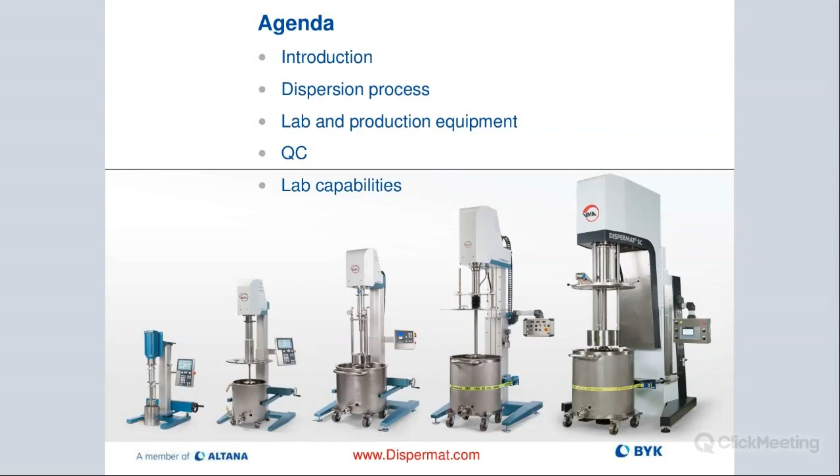So we're going to have a quick introduction about VMA, then we dive right into the actual dispersion process. We're going to talk a little bit about the different lab and production equipment solutions that we offer, and then a little bit about the QC process, and then some of the lab capabilities that we offer here in the US in Wallingford or in Germany at VMA headquarters. We have an outstanding applications lab where we can do a lot of trials and also upscale trials for production equipment.

VMA Getzmann is a German company, founded in 1972 by Hermann and Elke Getzmann, that couple on the top right. BYK-Gardner has had the exclusive distribution rights for the product line in North America since 1988. BYK actually used that equipment for quite a bit longer throughout the laboratory space in Europe and the US. What happened was some customers came in and saw the equipment run at the BYK USA facility, and they wanted to know if they could purchase that equipment. That was the starting point back then when, I think it was Dr. Peter, he decided that we would include that in the product line of our BYK instruments group, and that's how that whole thing got started.

So the company is still family owned. They have over 100 employees worldwide. They're known to make really high quality dissolvers, bead mills, basket mills for lab and manufacturing environments. They also have the Dispermat trademark that you probably have heard before, so they own that name as well.

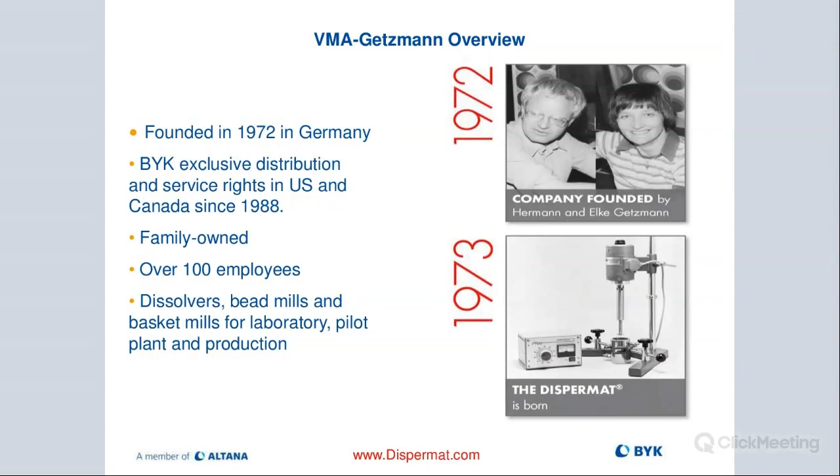And then they have a really nice lab, I mentioned that earlier, in Germany at their headquarters. The company is about 30 miles east of Cologne. So if you're ever over there and you want to visit the facility, let us know and we can set that up. And the lab in the US is at our sister company's facility at BYK USA, up in Wallingford, Connecticut.

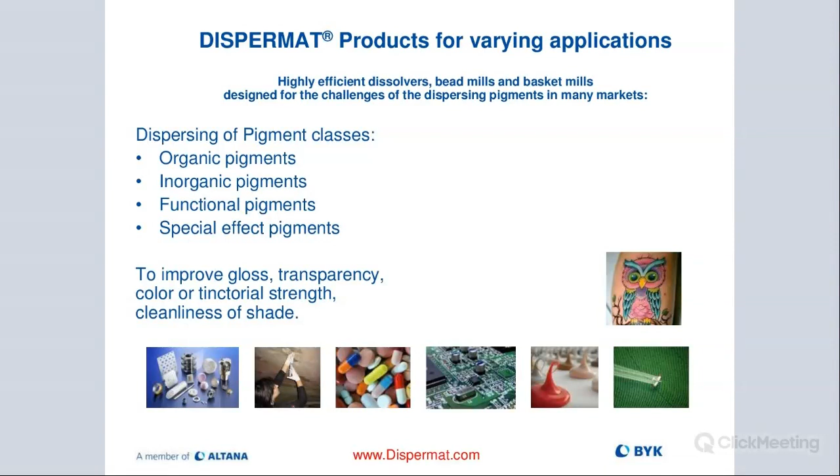So we have these organic pigments, we have inorganic pigments, we also have functional pigments and the special effect pigments. Some of you know those well - these are the silver flake effect colors, which have to be dispersed with a little bit more care because you don't want to destroy those special effect pigments, which would ruin the effect. So that's done a little bit differently. And the whole purpose of the dispersion process is to really improve the overall appearance. We want to have better gloss, transparency, color strength, and some of these major attributes that we are actually impacting by having a proper dispersion.

So this is a great slide, it really outlines it well. We are looking for improvement in our wetting process.

These van der Waals forces, some of you with a physics background may have heard about that. These are invisible electromagnetic binding forces that hold these pigment particles together. We want to reduce those clusters down to the primary particle size.

That will give us better color, better gloss, and improved overall appearance. We get better pigment efficiency that will help reduce raw material costs. We have more product consistency, and formulation improvement is another result of really good dispersion, along with a more consistent particle size distribution.

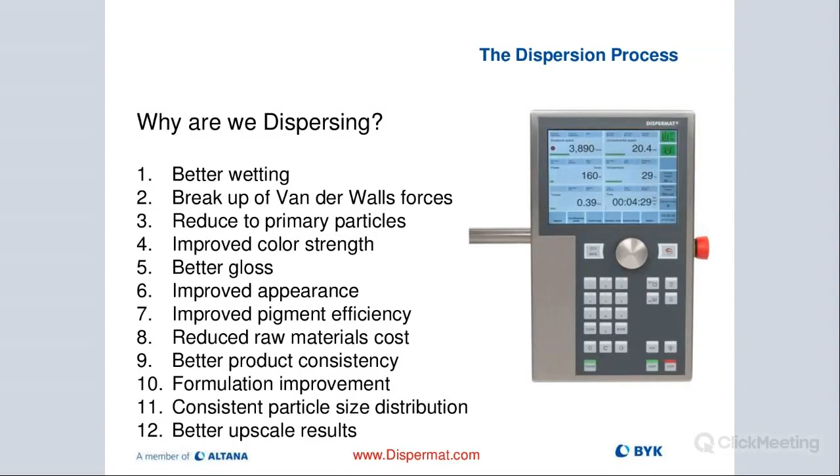Finally, we'll also get better upscale results, which is really important if I want to go into manufacturing and use the data from my laboratory or pilot scale process and then go into production. So that's why we're doing it and why that process is really important.

If we don't follow a proper pre-dispersion or dispersion process, it leads to poor quality of our product. We have issues with color, there might be a bigger delta between different lots, poor stability of our product, and also flocculation of pigments.

BYK USA is really good at helping select the right type of additives that go into the formulation to help avoid those kinds of issues, especially with flocculation, sagging, leveling, settling, and some other issues that occur. Gloss is also reduced.

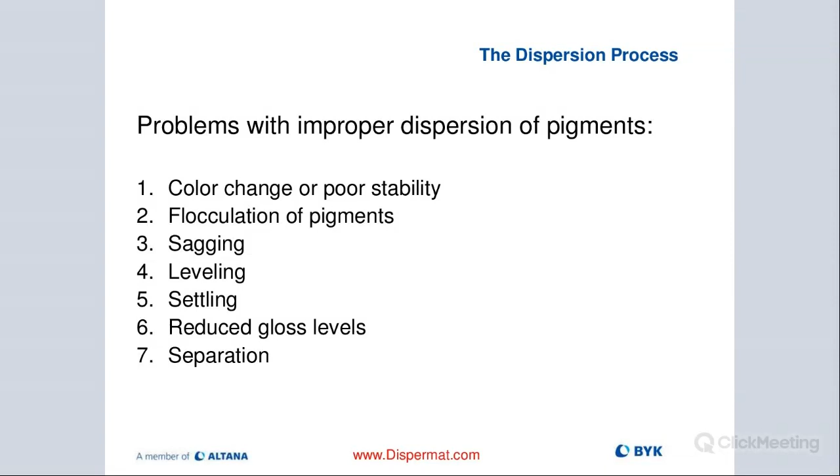Increase in haze is another issue that's coming up, and obviously separation is also another problem that happens if we improperly disperse.

It's really important to remember that we need good stability to have better color fastness, and that helps us with fading over time. Also, our brightness will be improved, which gives us the best color.

The rule of thumb in terms of pigment size is that the smaller our pigment particles, the better our overall appearance. That will also allow us to use less pigment and cut down on volume, which should help us reduce cost and save money if we properly disperse our pigment, because we don't have to use as much.

Usually, the higher the viscosity, the better the particle size distribution, and it also helps with processing the material. Obviously, there is a threshold—ideally we are looking between 3,000 to 10,000 centipoise. That's a really good range where we're able to process the materials really well.

If we are lowering viscosity, it's not an issue, but what that usually means is we have to put in more energy because the material is so low in viscosity that it's more difficult for energy to get introduced into the mill base. So we have to either drive with more watts, or run a different tip speed. There are some options to compensate for that.

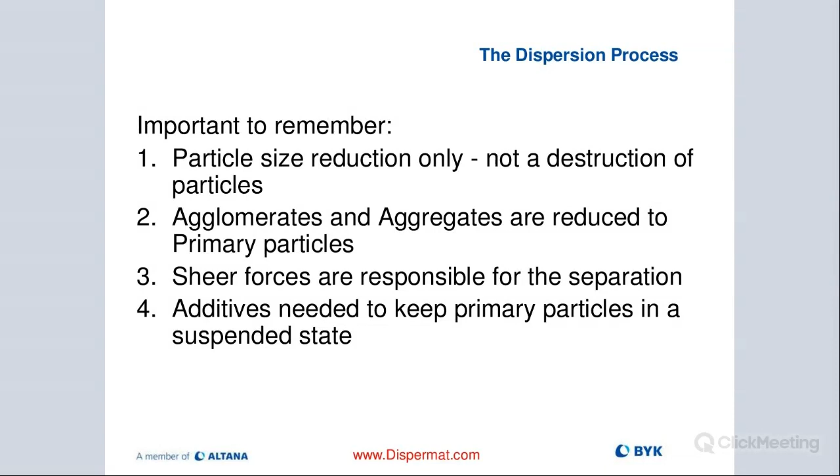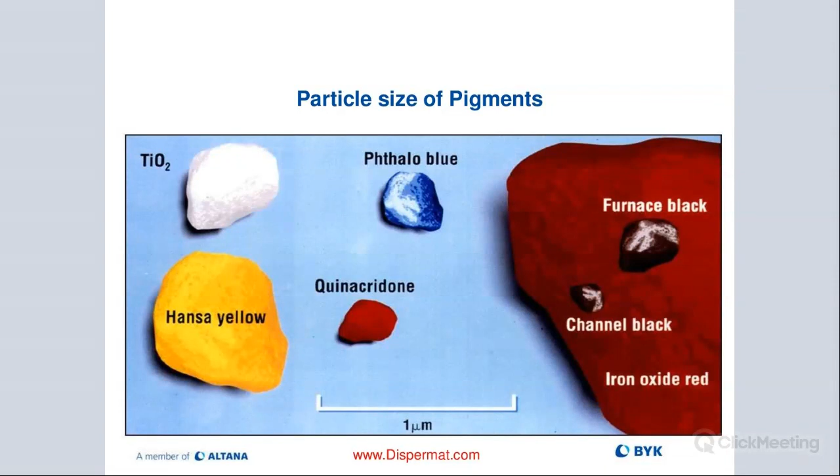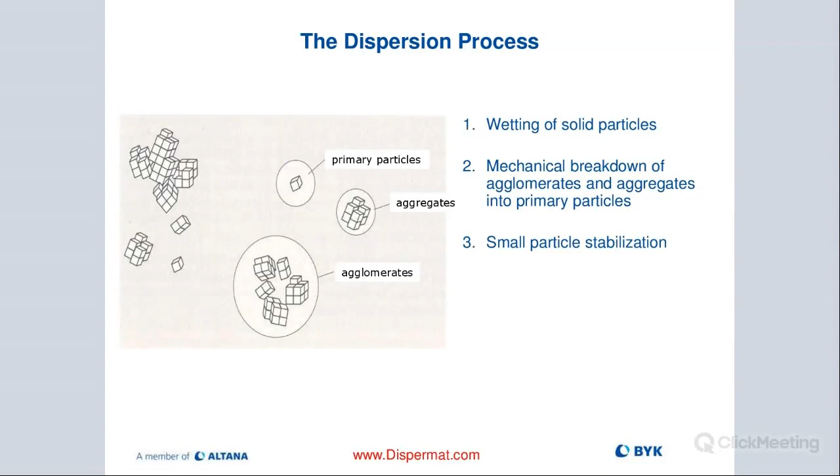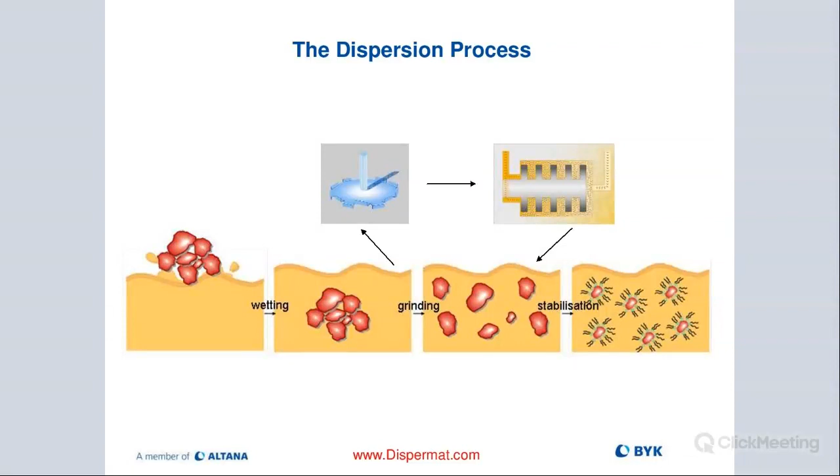Here's a great slide showing that in the beginning, with the Cowles blade, we're wetting our pigments or particles, and then breaking up these binding forces, the Van der Waals forces—usually not the case with every pigment, there are many different pigment types and families. What you're really looking for is about 10 to 20 microns of particle size, and at that point it's better to start milling. We can introduce more energy, more efficiency. So in order to reduce particles below 10 microns, usually we need to do some sort of media milling.

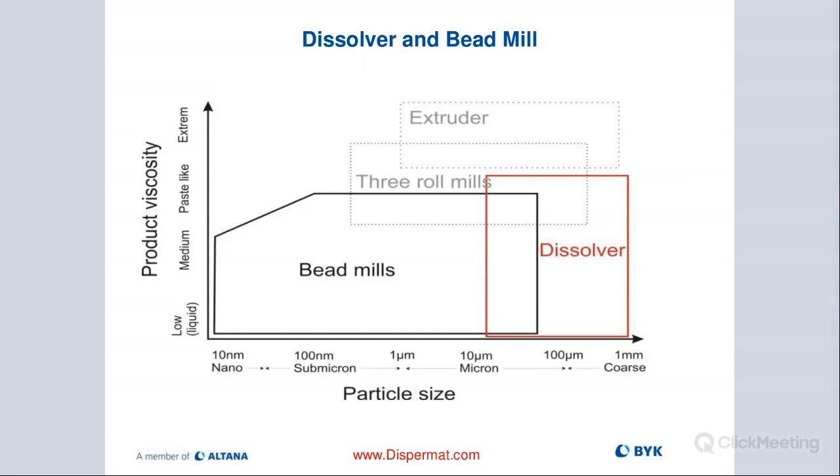Here you can see the breakout. We use a dissolver, as shown on the slide, down to about 10 microns, so very efficient. Then we need to do the milling if we want to go smaller. With the right milling setup, we're able to go way down, sub-100, sub-50 nanometers—not unusual with the right attachments. We have nano kits and dedicated nano milling systems that can be utilized to really get down into that particle size range. We also have some of that capability up in Wallingford at our applications lab at BYK USA headquarters. So if you have any products you want to test or come take a look, we'll be more than glad to discuss that with you and have you up there.

So we offer a variety of different technologies in this dispersion process, but in the pre-dispersion process, what you really want to look at—and this is the same for all the different types of equipment—is the tip speed should be between 18 to 25 meters per second. That's the sweet spot, that's where you want to be. Basically, that's where you really start breaking up these binding forces.

Anything less than that may give you the same results, but it will take much longer. Or in some instances, you may never get there and get the results you're looking for. And we would use dissolvers for that with those blades.

We have different types of systems: the SC for production, and a budgetary model, the LC. We have a really nice small unit for the lab space called the CV with different safety functions, which we'll go through. The CN and AE are our higher end models with different upscaling capabilities and also data storage capabilities.

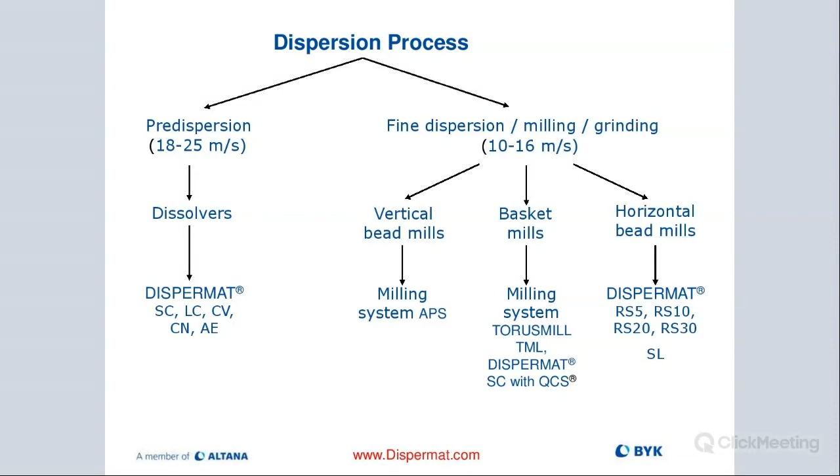And when we talk about milling, the fine dispersing, we obviously have different types of vertical bead mills, basket mills, and horizontal bead mills also available for lab as well as pilot and production.

So here's a very important slide that always comes up: the diameter of the blade in proportion to my container diameter. You're looking at about 1/3 to, in some cases, 2/3. On the right side there's a nice table, and you can see there isn't just one blade that fits every container, or one container, one blade per container.

It's really a range, and depending on the viscosity and flow pattern, you can really see - for example, if I have a 1 liter, about a quart, I can go all the way from a 30 up to a 70. That's quite a bit of range, but the sweet spot, probably what we do in the lab, is use a 50 to 60 millimeter blade depending on viscosity to achieve really good results. We've seen in some instances, if the viscosity is very high, we have to go with a little bit larger blade to move the product.

And in some cases, for certain formulations, they require a smaller blade. But there is a really nice wide range of different blades, and many different blade types, so we have a good variety. I know some of the other companies out there offer some very unique blade solutions, so go check that out online.

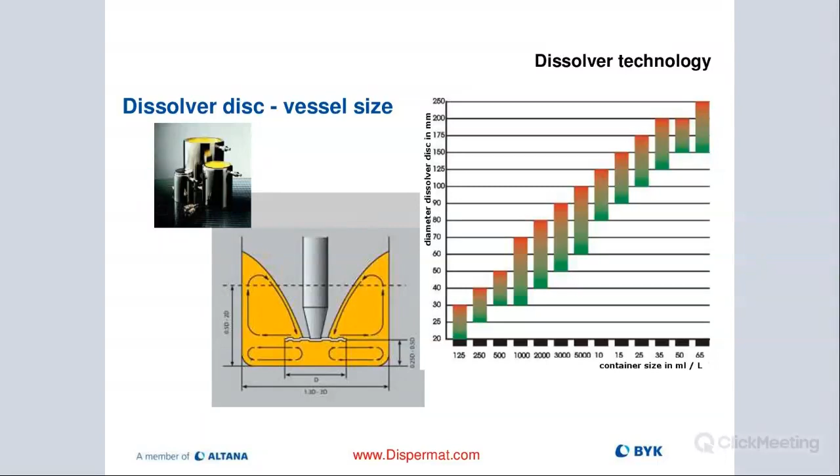Then here's a very important calculation: how do you figure out the tip speed? The tip speed is actually the RPMs multiplied by pi times the diameter of your milling disc. In this case we figure out meters per second. So let's say you have a 50 millimeter blade, you multiply it by 0.05, and then divide everything by 60, and that would give you meters per second if you want to calculate that.

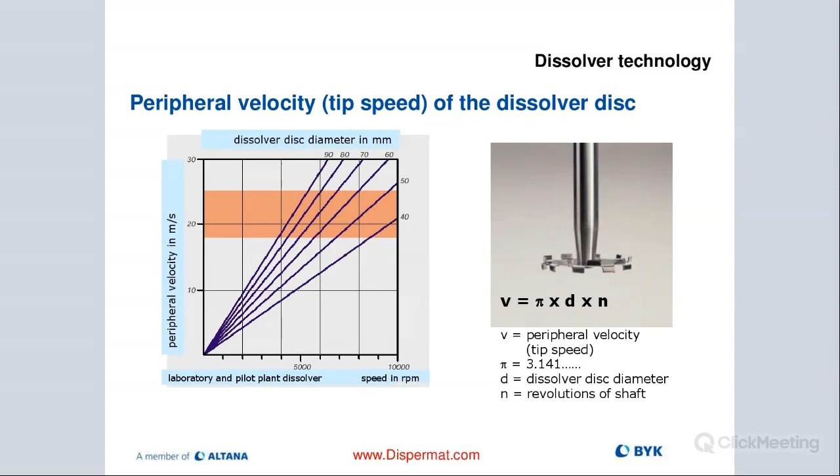On our higher end DISPERMATs, that's actually displayed on the control panel, you can see it. On the lower end models or intro models, you have to calculate it. And that's why that formula could be helpful.

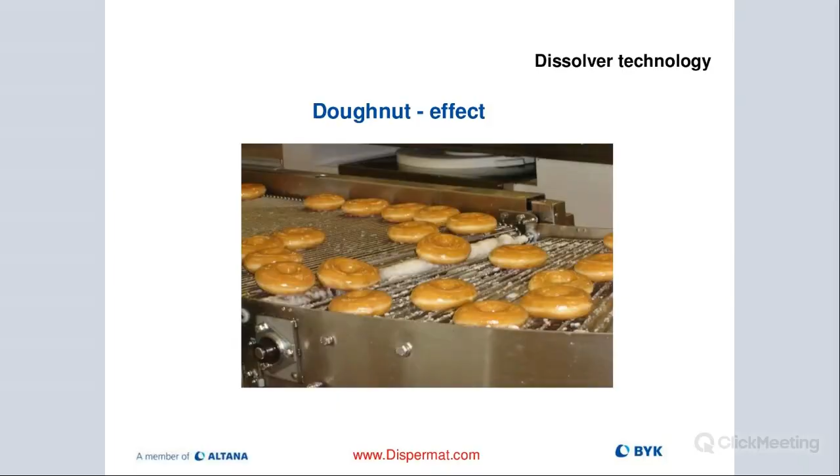So we have something called the donut effect, and it's really called that. The reason is, when you look inside the container and optimize the dispersion process, at 18 to 25 meters per second with a really good viscosity range, you should see something like that. And then you already know it's very likely that you're optimizing the process and things are getting properly dispersed. That's called the donut effect, and it's really desirable in the pre-dispersion process.

When you're milling, you don't really have a donut - this is really something that only happens in the pre-dispersion process. So blade diameter, the geometry of my blade in relation to my container size, obviously plays a big role as well. If my blade diameter is too small, I may not be able to get a donut, and if it's too large, maybe I won't have a donut either. So this is really about optimizing all the different variables, and then you should have a donut.

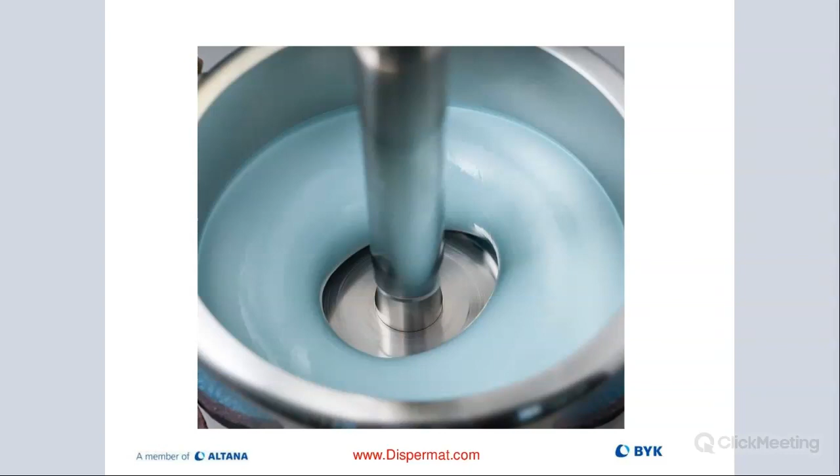Also, if the viscosity is really low, it's difficult for a donut to form because it would automatically collapse as soon as it has a chance to form. And when the viscosity is too high, let's say material is like peanut butter, you will not have a donut because the product just wouldn't move for a donut to actually appear. So this is something you'd see in the 3 to 10,000 centipoise range, when you optimize these variables we discussed, and you should really have a nice looking donut.

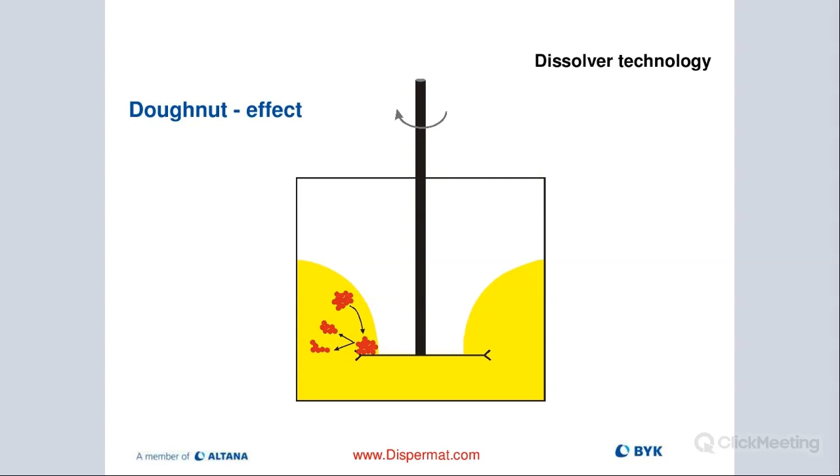This is what happens on the graph. You can see at the edges of the blade, this is actually where the separation of our particles takes place - that's where we break up these van der Waals forces. I'd say this also happens below the disc. It's not shown on this particular picture, but you'd have a similar effect below the disc, not just on top. So that's something I think is missing from that picture.

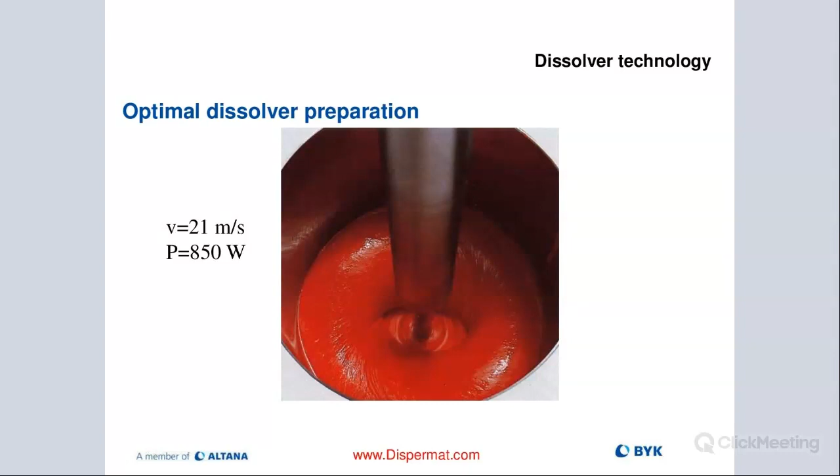Okay, here you can see definitely a good looking donut. We are running 21 meters per second, and at that viscosity range, we are able to put in 850 watts of energy to get that tip speed. So that's what you want. It looks great.

Now, in this case, we're not so lucky, and our viscosity is different. We're only putting in 320 watts of energy at the same tip speed. That means our viscosity is probably a little bit too low, and we're not able to properly disperse this material. So what could help there is changing formulation to bump up the viscosity somewhat. You could increase the tip speed, maybe for a better donut.

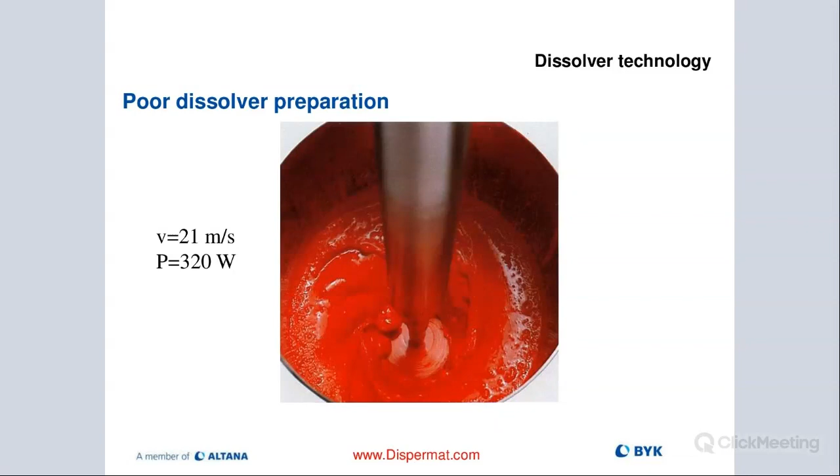Also, what could help is maybe change the blade diameter. That would also be something else that you could look at. That would probably help with putting in a little bit more energy. But that's something right here on this picture that's not desirable. We would call that a poor dissolver prep.

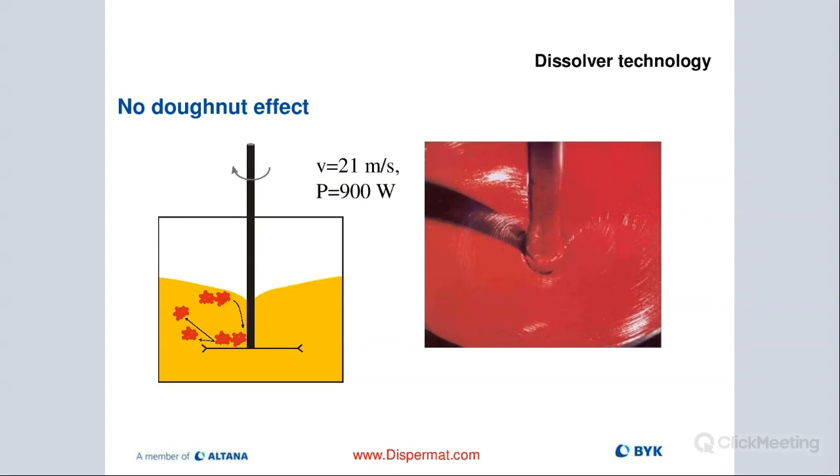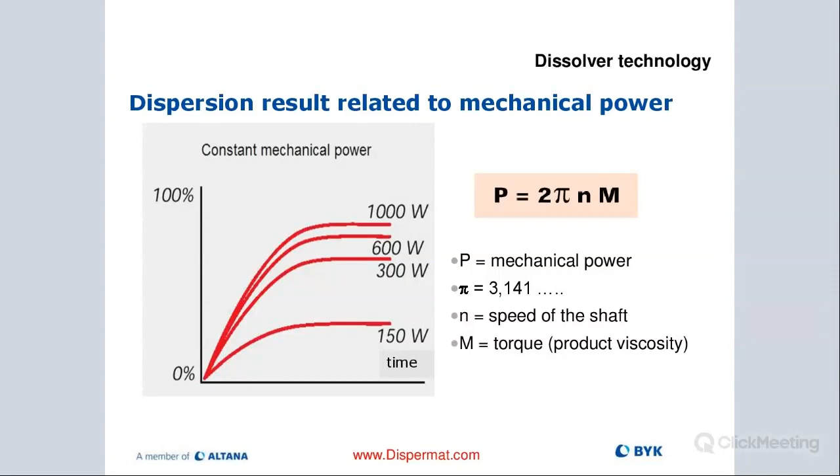This is just a slide on dispersion result related to mechanical power. So P, mechanical power, equals 2 times pi times the RPMs times torque. That will give us the amount of energy that we're actually putting into our mill base. And on the higher end models, we show that we can also run our equipment with what is called constant power instead of just constant speed.

That way you select a certain amount of energy you want to put in, let's say 1000 watts. And then the machine, depending on the viscosity of your material, will automatically adjust the speed to always maintain that amount of energy. So if our viscosity is increasing, our speed will decrease because we are maintaining the 1000 watts of energy. If our viscosity decreases, then our speed would increase because we're still maintaining that 1000 watt energy input. And that is something called constant power.

And that is sometimes used also to calculate upscale costs or manufacturing costs, because it will tell us exactly how much energy we are using in a certain amount of time to manufacture or disperse X amount of product. So that can be very helpful. And that is a feature that we have on the higher end models like the AE or the CA. That option is available. We can also do what's called a net power calibration, just to mention that.

That means that we run the machine without any product for, I think, 30 seconds. And then all the values get set to zero, the energy that it's using to operate itself, because the machine obviously is using power just to run the shaft, even if there is no product. So when we do a net power calibration, we factor out that influence or that noise, and then the numbers we see on the display are only related to our product and not the machine input. And that also is available on the higher end models.

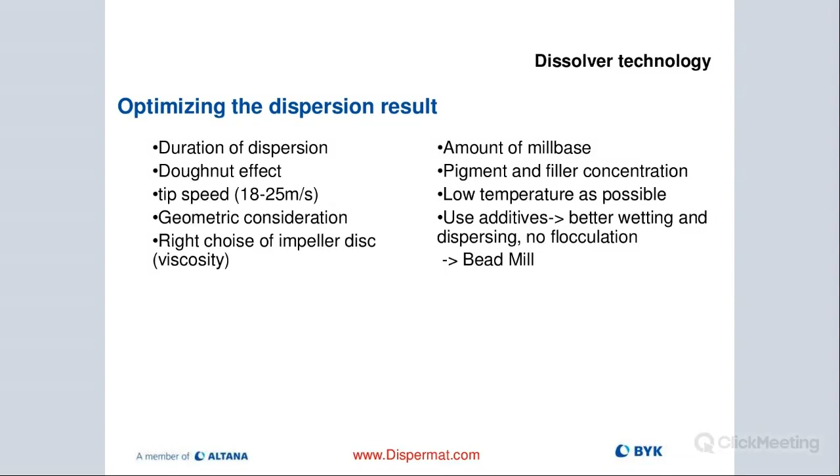So the difference here is really with the dissolver, it's a necessary step. The pre-dispersion before I'm actually going to start milling. I have a limited amount of energy input. It's just such that a blade alone without media is just a blade, and will never allow for such a high energy input as you have with a milling disc with media. So therefore our shear force is limited, and it's really only to deagglomerate.

So we are going from the larger clusters, these agglomerates, down to the aggregate level, and that's when we would use the Dispermat or dissolver. And we're not breaking down to the primary particles with just a disc. But again, it's really critical that we use that step. And if we stop at the aggregate level, then obviously we're going to have appearance issues, and our product is just not going to be as consistent and maybe as desirable for the naked eye

if we would process this then in the secondary step with the media mill, where we're able to actually add a lot more energy, and then we really break down these binding forces down to the primary particle size, and that allows us to actually go sub micron range all the way down to sub 50 nanometers. We have seen that will give us a much better looking product, better color strength, particle size distribution, transparency, haze, gloss. All these things should be affected by having a good processing step through a bead mill.

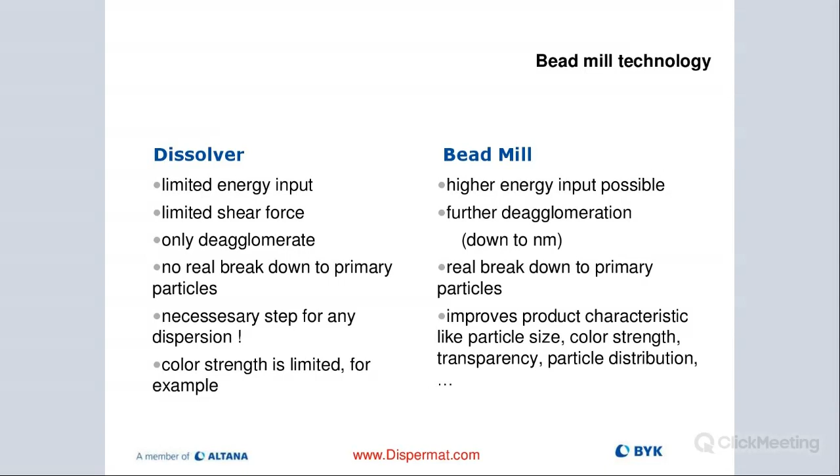But right below the motor is a flange, and that's called the quick disconnect, or the TML, a DL shaft, we call it. And it's basically a clamping ring that you can open, and you can rotate that whole assembly 180 degrees, and then you can replace the dissolver shaft, for example, with the rotor stator, or you can add a basket mill or a vertical bead mill, all on the same machine. And that is something that is patented with VMA to be so versatile with the quick change system. And it basically allows you to purchase one machine for many different types of applications.

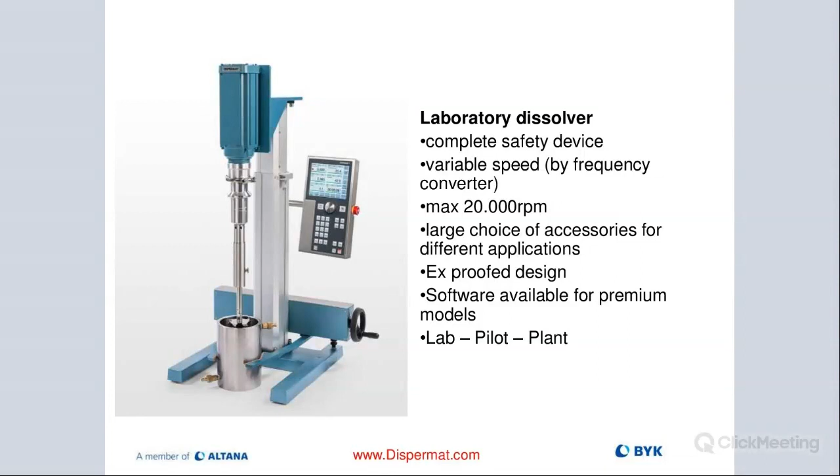And then you can see on the Dispermats, it's also very important to our processing, that we have a shaft guard that allows us to actually run the disperser without having any rotating or moving parts outside of the container. So that shaft guard, there's a little thumb screw right there that you can loosen and tighten to move that shaft guard up and down along the shaft to ensure that the shaft is properly covered when you are dispersing your material.

Okay, then with these different types of tools, we have them as a homogenizer. There's just a butterfly attachment or a propeller blade that allows you to turn that whole thing into a mixer or a homogenizer. You can also add a rotor stator, as I mentioned. That's an attachment that allows you to emulsify different products at a very high shear rate, and then you would basically mix them or emulsify these products.

That usually is a good idea if the viscosity is very low, then that's a good tool to have. If the viscosity is very high, nothing would happen. The rotor stator would just basically stick in your mill base like a consistency of peanut butter, and there is no way that product would actually get pushed through these little gaps of the rotor and stator, so it wouldn't actually accomplish anything. So the viscosity needs to be really low for that to be effective.

And then, of course, these are all out-of-the-box dispersers that have the capability of obviously using it as the dissolver with the Cowles blade. Most of the models ship with a number of different blade diameters. Well, then you could convert them either to a basket mill by just attaching that with the quick change system, or add a milling disc and then use it as a vertical bead mill with our APS system. It's called an air pressure system. It's kind of a vertical bead mill setup. That's really nice.

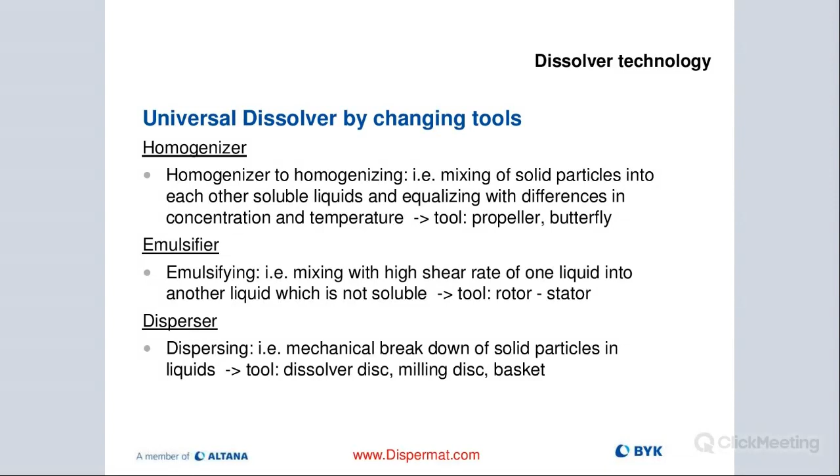It's basically a rotating platform, and the sweeper blade is actually fixed, and then your container would spin once it's on the platform. And then basically, because it's on this spinning platform and the sweeper blade is fixed, that's what would move the product off the container wall and push it into the middle of our container, where then the dispersing blade will take over and do the proper dispersing of our mill base.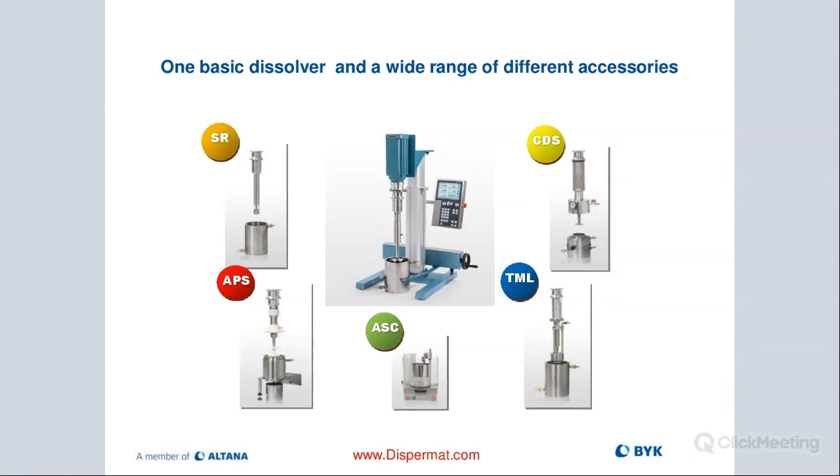So I just briefly want to go through a few models if you're interested. This is our entry-level model. It's called the LC. Just a very simple speed display. It's got a timer function, and that's it. You have to lift. I'm not a fan of it personally, because I like to have the electric lift capability that allows me to really lock in the right blade height in my container, and I don't want to do this by lifting up the motor head every time I want to change position. But that's what you have to do on the LC.

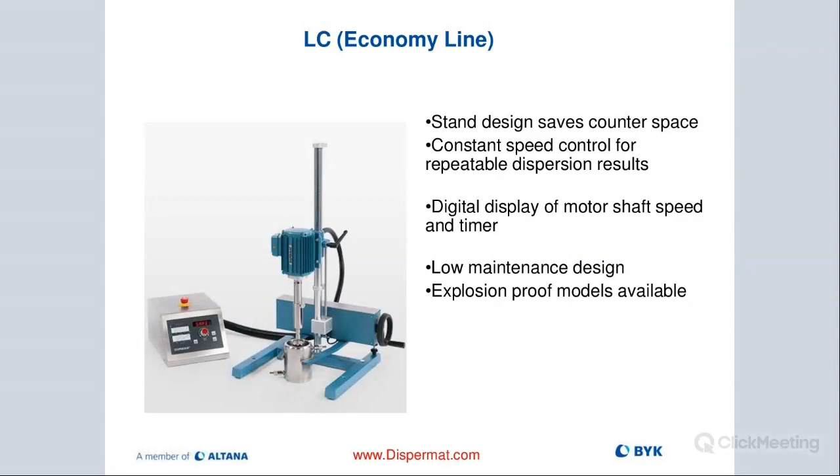You see that little lever right next to the motor on the stand, and that's what you have to open or close, and then it allows you to move the motor or the shaft up and down the column. It's okay. It's not my favorite, but it's comparatively an inexpensive lab scale solution. We also offer explosion-proof models in that design, but I want to mention they all run on 400 volt or 480 or 208, depending on the power in your building. So they're not single-phase. All the explosion-proof models are three-phase machines.

Then we have the CV line, which is actually our most popular lab scale model that has the same capabilities as the LC, except you now have the automatic motor lift up and down, so you can really precisely position the blade in the container without having to move the motor up and down by hand. It has a timer function, obviously the display of our current speed, but this one will also give you a torque reading and product temperature.

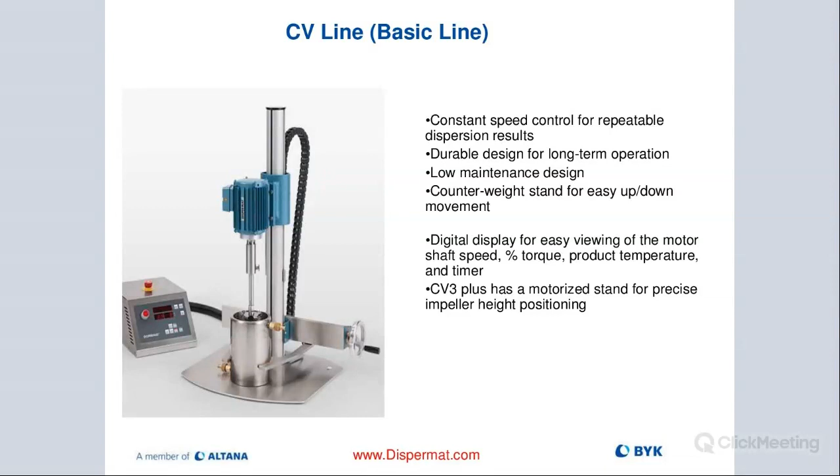Product temperature is really important if you want to convert the CV model to a basket mill, or want to attach a basket mill or an APS, a vertical bead mill. That's when you really want to know what the temperature is during the milling process. So this particular model will give you that capability.

Then we offer the CN, which is more of a higher end model than the CV. You also have all the same safety features, but you're able to really upscale with this particular model and stay within the same model family. I can go up to about 50 gallons of material if I'm getting a CN 100, for example, and that would allow you to really disperse large volumes for pilot scale, and the same machine would be available for small lab scale as well. So you would stay within the same model family if you're trying to upscale. Same control capabilities, speed, torque, temperature, and timer function. And again, it has the electric lift motor to properly position the blade in the container.

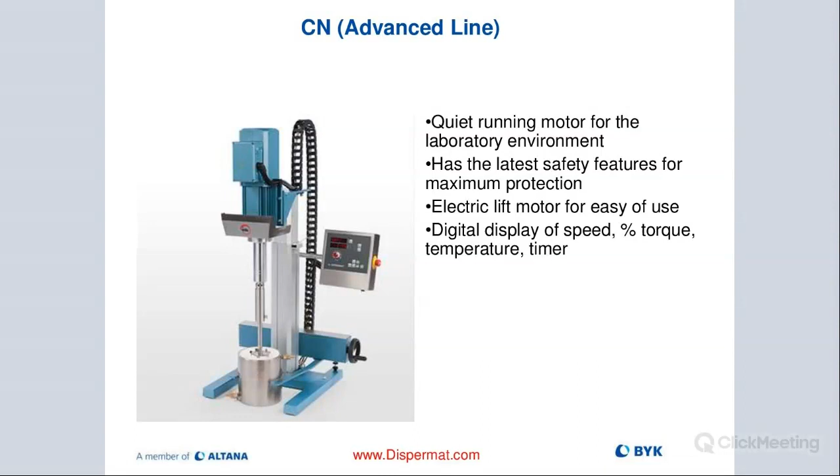And also I want to mention all of our motors are direct drive. We do not have any belts, so there's no real maintenance. They are brushless step motors. They're extremely quiet. If you have never seen one, at the next show, American or Western Coating Show, we will have a model. Come up to the booth, we'll turn it on. You'll be surprised how quiet they are. You won't even know that they're running. And also, they have very low vibration. You could put a quarter on top of the motor at high RPMs and it would not even move, because they're so quiet and so stable.

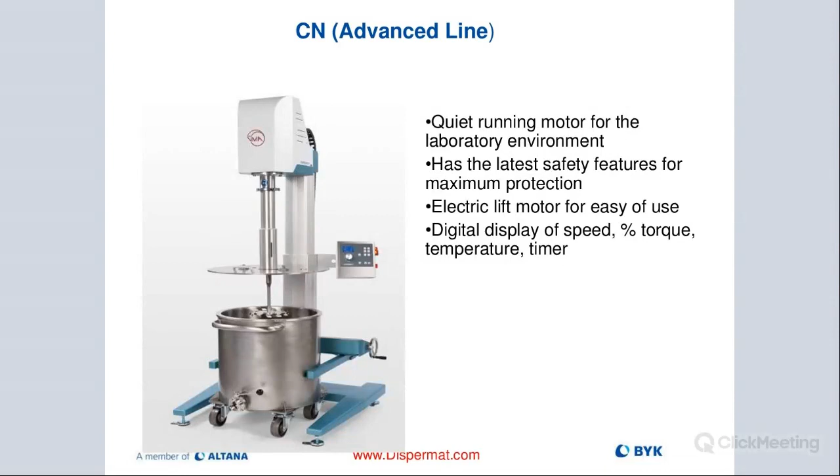And then we have the larger CN right here, same type of capability, except this one is now for small production or pilot. And then this is our premium model, which is called the Dispermat AE. That model, as I have mentioned before, comes with that C technology package. If you're looking for something where you want to program a recipe, you want to store data on a stick or on a PC for creating lab reports, if you want to watch the dispersion process in real time on a graphical interface, then you have these capabilities with that particular model. It's really good for upscale.

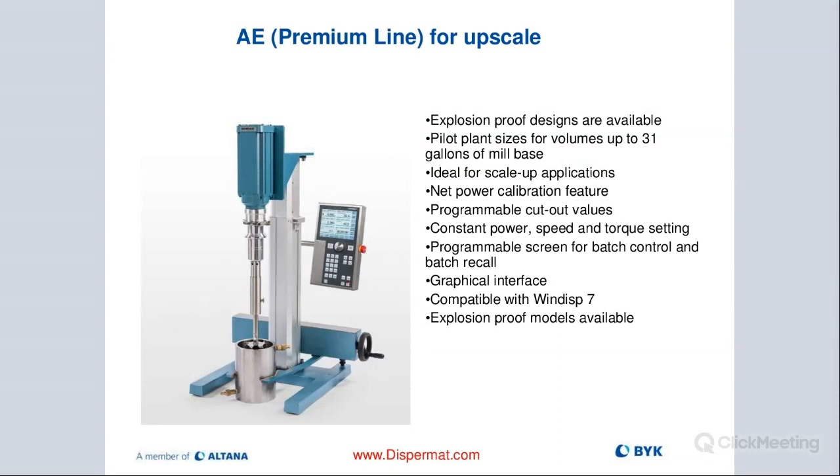And you can get larger models, again, similar to the CN, all the way up, in this case, to 31 gallons of mill base. And also explosion-proof models are available. Here, same model except larger.

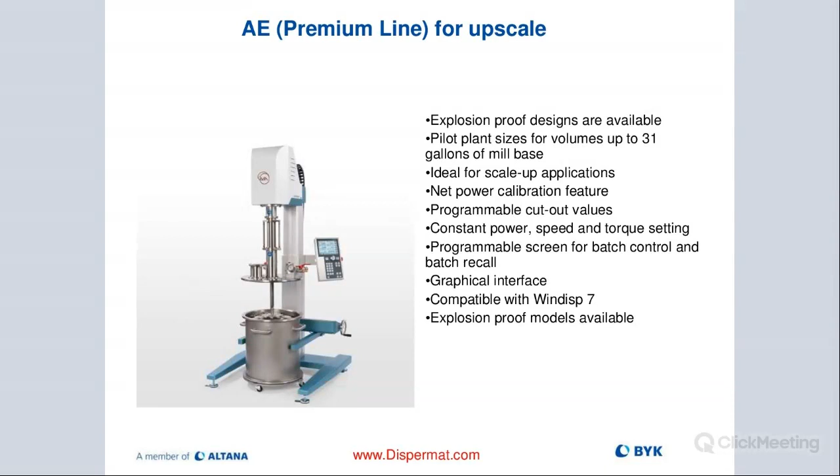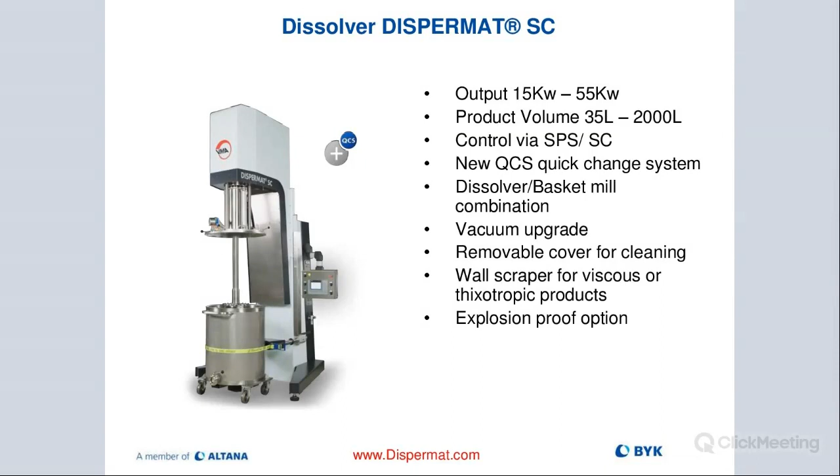And then we have the Dispermat SC for production, up to 2,000 liters of product volume. We also have the quick change system, which is really cool. For production, you have one machine that can act as a disperser, a dissolver, or a mixer, and at the same time you can convert it into a basket mill with that quick change system.

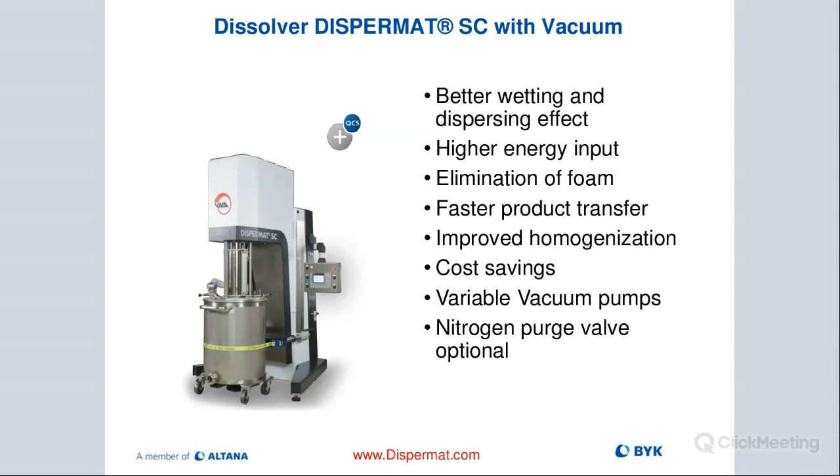We offer vacuum capability for manufacturing, and some people use it for lab scale too, but that's a manufacturing scale feature. Some people prefer to do the dispersing process under vacuum to remove all the air, and also do milling that way. If you mill under vacuum, it improves milling efficiency. Imagine air bubbles in the mill base act like tiny little air mattresses that buffer the blows of our beads during milling. So removing those air mattresses gets us better milling efficiency and a more homogeneous product.

In some cases, we have the ability to add a nitrogen purging valve. Some people like to work in a dry environment, so they want nitrogen or another inert gas, and that's also possible to add in our models.

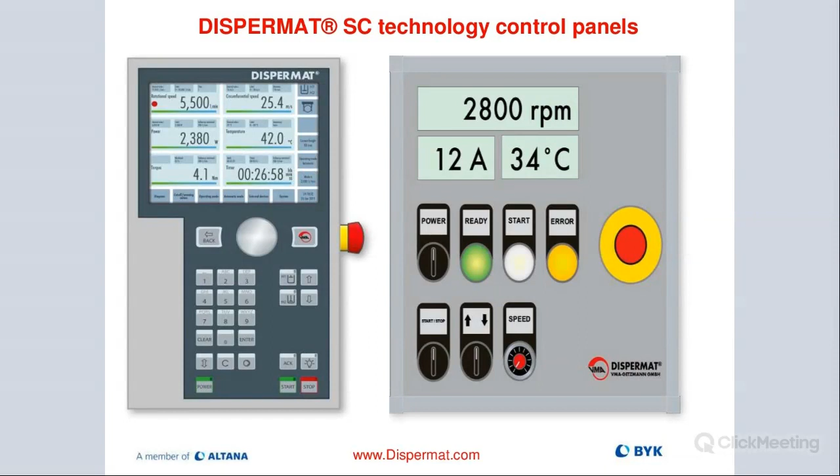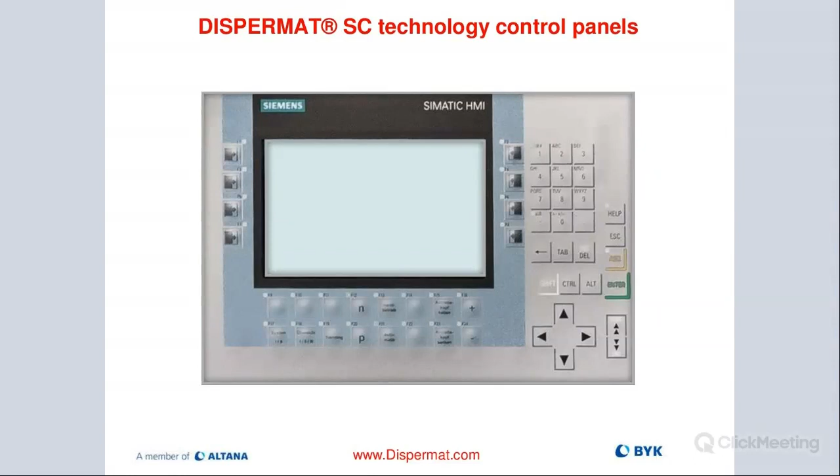We also have that technology, PLC, where you can actually create your own program or tie it into your own QC package. Some people have integrated scales. With that solution, you basically control the process the way you want to control it, but you can also add different parameters that wouldn't be available otherwise. Now, the problem with this particular solution is that it's made by Siemens, and the lead times are excruciatingly long. I think the last I heard was like 12 or 16 months lead time if somebody would want that particular control capability.

On the higher model, we have the ability to program what are called cut out values. So we can have a recipe where we put in all the parameters we want, even the height of our blade, timer, temperature, and then we have cutoff values. Let's say I have a temperature sensitive product. I can select it has two warning zones and an action zone. So let's say I have 80C as my limit. I can have a warning at 60C, a warning at 70C, and then once it reaches 80C, we can tell it to either shut the machine off or run at a different speed. So there are some ways those warning signs can be dealt with.

You can also have cutoff values for the energy input or the speed if you're running with constant power. If you're running with constant speed, you can have cutoff values for your power input. So there's a number of ways you can modify your process. You can also see the entire dispersion process in real time with trend lines for each of these variables, which allows you to monitor the entire dispersion process in real time.

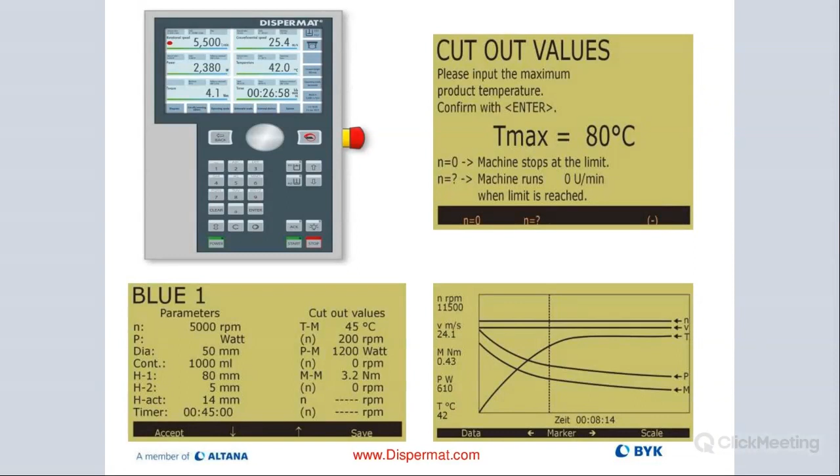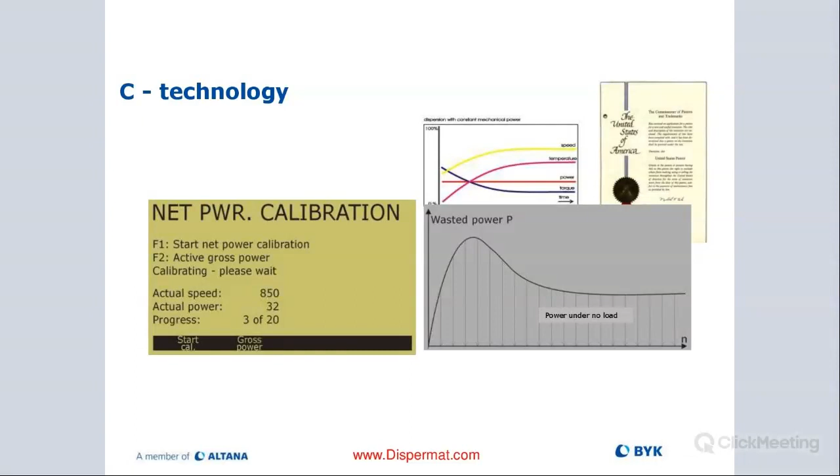The net power calibration, I had mentioned that earlier. It's basically running the machine without any product for a couple seconds, and it will factor out the load it uses to operate itself without product. Then when you're running it with product, you know all the values, the energy input and torque value, are strictly related to your material.

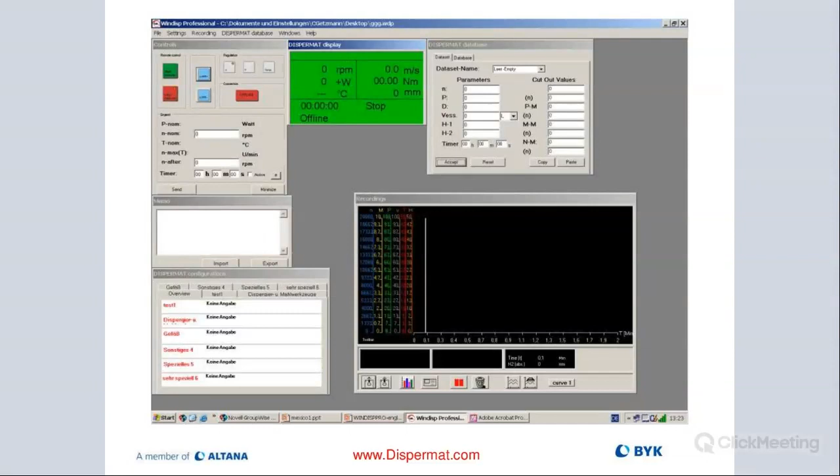But we also have capabilities at Wallingford, Connecticut, and we do the same thing. We love to have customers come in, and we want to do a proof of concept, show them how it works, and we also added some additional new capabilities.

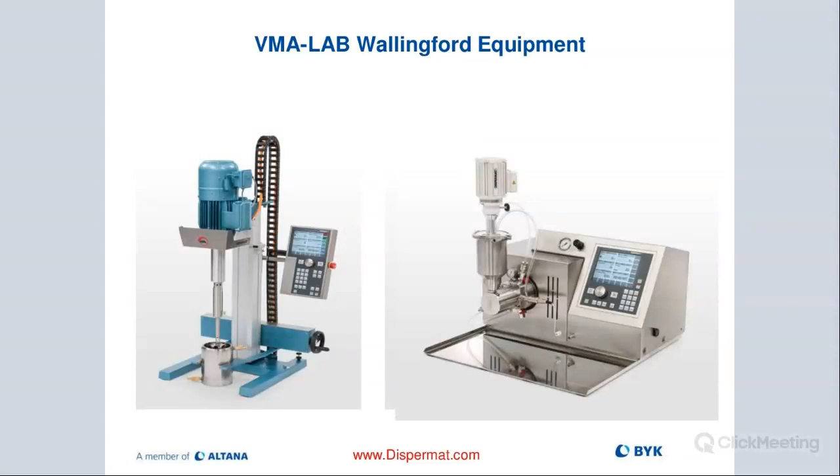Also invite our colleagues from the BYK additives team into the meeting or the lab to give advice on how to improve a formulation, or if there is an issue with flocculation, or a better binder, or anything that will help improve the process or the product appearance, then we can offer those support mechanisms that we have in place. It's also great to leverage the synergy between the different divisions, and it's a showroom to show you.

If you don't want to run product, just come in and see what we offer. And then finally, we can also use it as a meeting or a seminar location. If you have a larger group and want to come in and learn about dispersing and milling, we can have that set up too. And that's it for today.